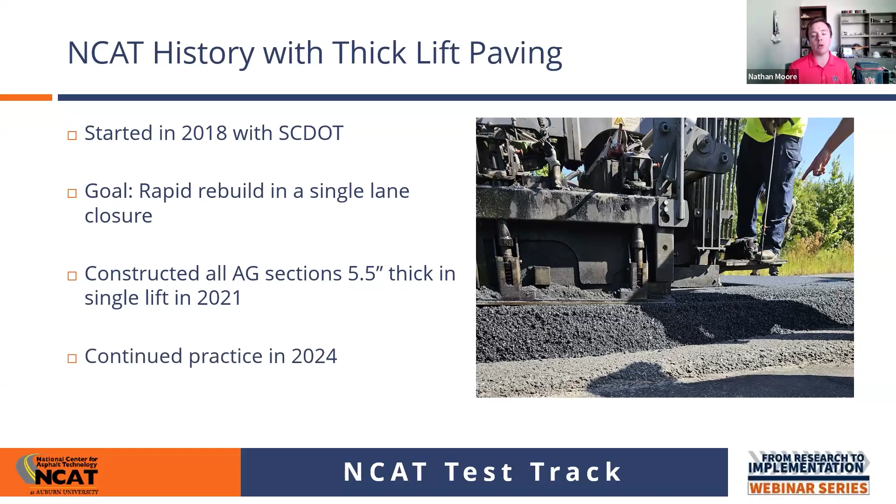I'm going to briefly skip to the end and talk about lessons learned, but then I'll let Travis, Kimmy, and Jay talk more about this. If this picture doesn't make it clear, smoothness can be challenging.

However, on the NCAT test track, we have the added challenge that our test sections are 200 feet. I think the folks over in South Carolina have figured out how to do this really well, but smoothness can be an issue because you really only have one shot at it.

Warm mix asphalt is your friend. It helps with compactability. If you're trying to compact 6, 8, whatever inches of asphalt, that's a lot of material you're trying to move, and any compactive effort aid that you have is helpful.

Joint density is also important. You really only get one shot to seal up that joint. You don't have extra layers to have multiple opportunities to seal it up. So joint density is really important, and I'm pretty sure Travis and our friends from South Carolina are going to talk about that.

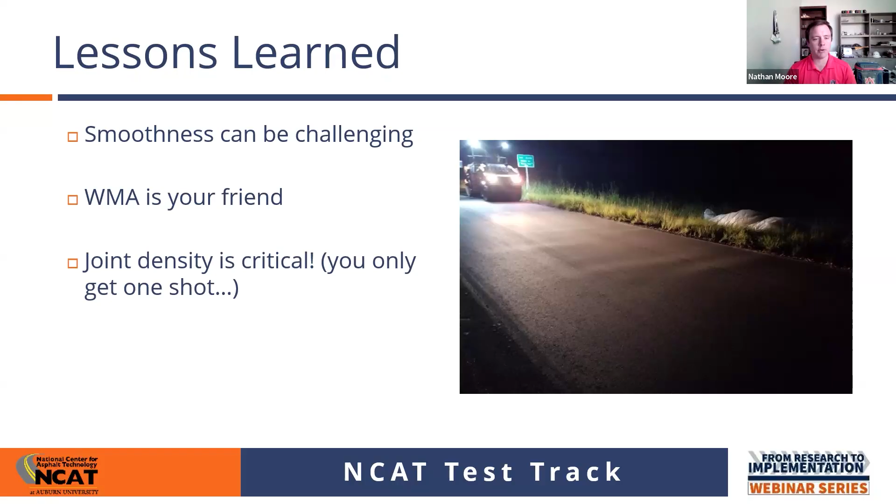With that, I tried to make my point as short as possible because I'd really like to hear what our presenters have to say. So Travis, I'm going to quit sharing and kick it over to you.

So this is something I'm really excited about. It's not the first time we've done thick lift paving on our implementation webinar series. In fact, our very first one about 3.5 years ago was thick lift paving and the work that South Carolina has been doing. So what do we see here?

A road that absolutely needs rebuilt. It's probably failed all the way through. And if we look down that road, we can see that that is a problem.

So I really want to answer this question: how can we reconstruct our full depth asphalt pavements in less time? How can we be less impacting to our traveling public, with less time for our contractors and inspectors out there in the traffic?

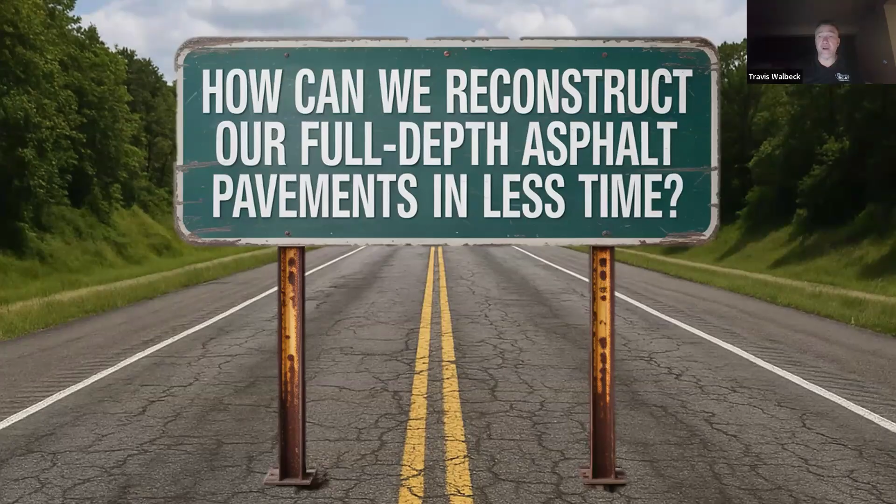And so one of the answers that's out there, one of the things we're doing, is thick paving. Let's pave thick. And when we say thick, how much are we talking, right?

So a lot of specifications out there have a minimum thickness. Some of them also have a maximum thickness. I was just looking at one yesterday morning with a state that had questions about thick lift paving, and their specification has a limit of a 3-inch maximum lift thickness for all of their mixes. So that's kind of a change they would need to make if they wanted to use this kind of technology.

But I like to say that thick lift paving starts around 5 times the nominal maximum aggregate size and goes up from there. NCAT has done work paving as thick as 16 times the nominal maximum aggregate size, and still got density, and still had a good, solid quality pavement.

So what are our concerns, right? What concerns do we have if we're going to do thick lift paving? And that first one is density. That is the concern all the time.

That's, I think, what we all came up in the asphalt industry understanding: that the thicker we go, the more problems we're going to have with density. And through the research that has happened at NCAT, the experience that South Carolina has, and information I'll share from Utah, we have found that density is actually easier to achieve with a thicker lift pavement.

I've also seen research done in Florida and Texas and other states that backs that up, saying that a thicker lift actually gives us a better opportunity for density.

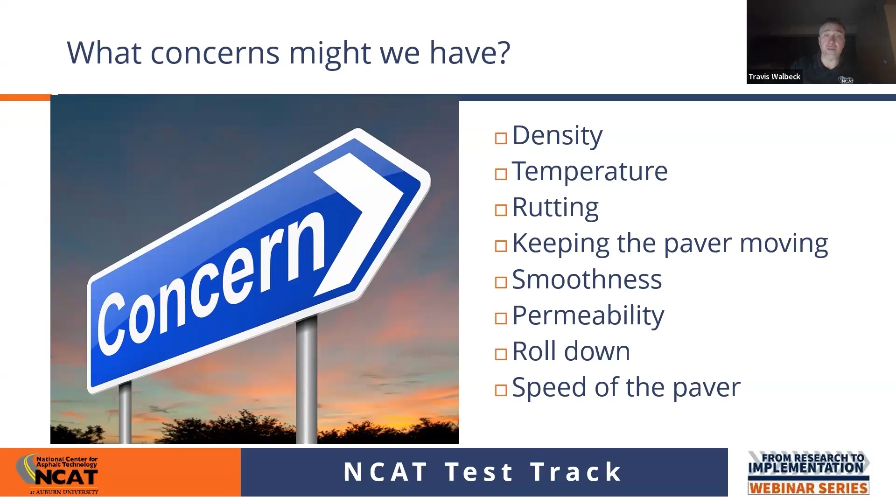And then that paver speed, we're not going to go 35 foot a minute. We're just not. That's kind of something our crews need to work with. They typically want to go a bit quicker, but with that massive amount of material we're putting down in a single pass, the paver's got to move much slower. Plus, our trucking and hauling distances are going to have an effect on how fast we can move that paver.

So I kind of want to cover a few things here. Some of the research that NCAT has done. I also want to talk about a couple states that have really taken this forward. And then I want to talk about some of the specifications and the changes that states have made that have helped them be successful with this thick lift paving, and a few keys to success.

So NCAT's research started, like Nathan mentioned, in 2018 when South Carolina DOT came to NCAT and said, hey, we want to try this. We think it's something that can help us and move this forward. So the first bit of thick lift paving done with the NCAT test track was actually a test section off the track to try to make sure that this could be constructed. So we have this S9 test pass, or test section, that was done off to the side of the track to make sure that was something that could be utilized.

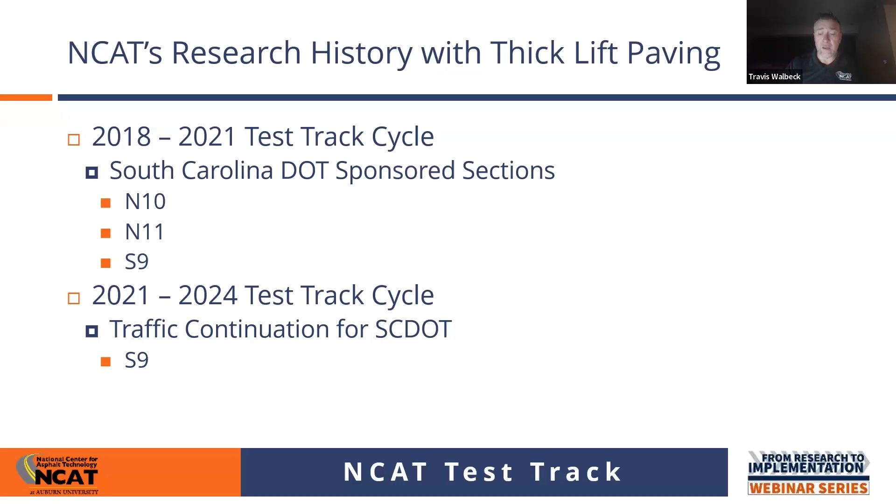During that cycle in 2018, there were actually 3 sections that were built: N10, N11, and S9. All of them performed fantastically. They're really happy with the results we found there. With S9, they decided to continue the traffic into the next cycle, so that ran clear into 2024. And as Nathan has said, they're still doing some deep rebuilds on the test track during construction, and they're utilizing this technology that South Carolina sponsored and helped move forward with the track.

So again, we talked about some of those concerns, right? Density, smoothness, and temperature. Those are the 3 big things that I want to kind of talk about here with the concerns that we may have.

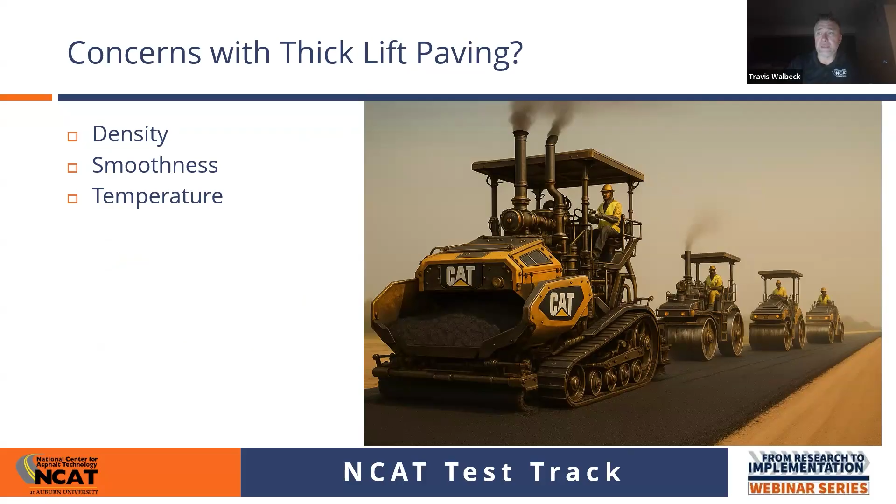With density, the first thing we always hear, and what we were all taught, is you cannot get density when you pave this thick. I really like the videos that Utah DOT puts out. Here's our good friend Howard Anderson, who promotes this technology and the things they're doing in Utah. But he says, yes, you can. We do it all the time. So they are able to achieve that density.

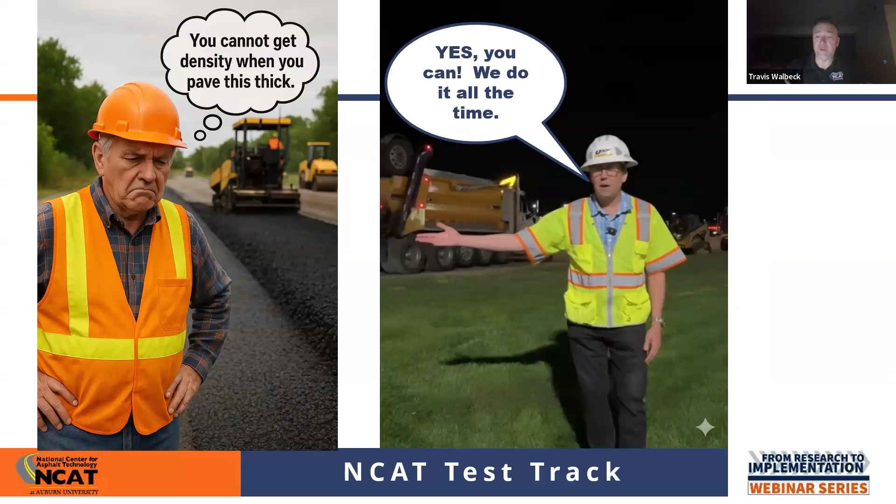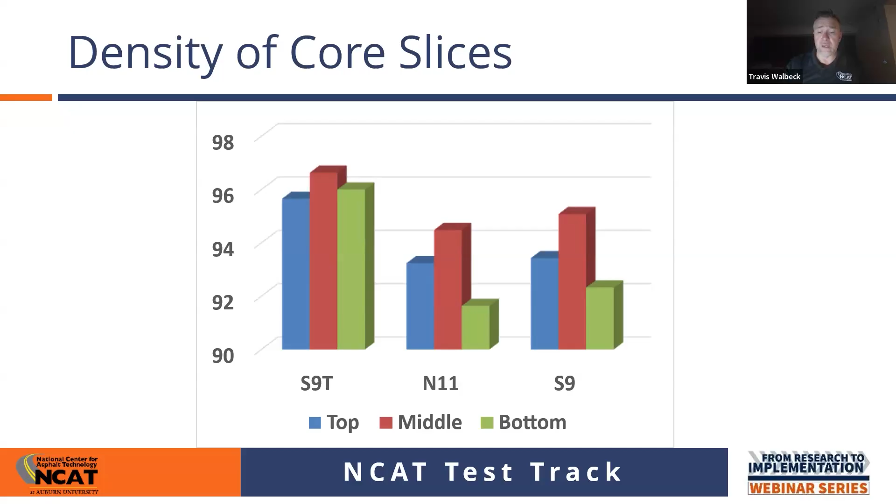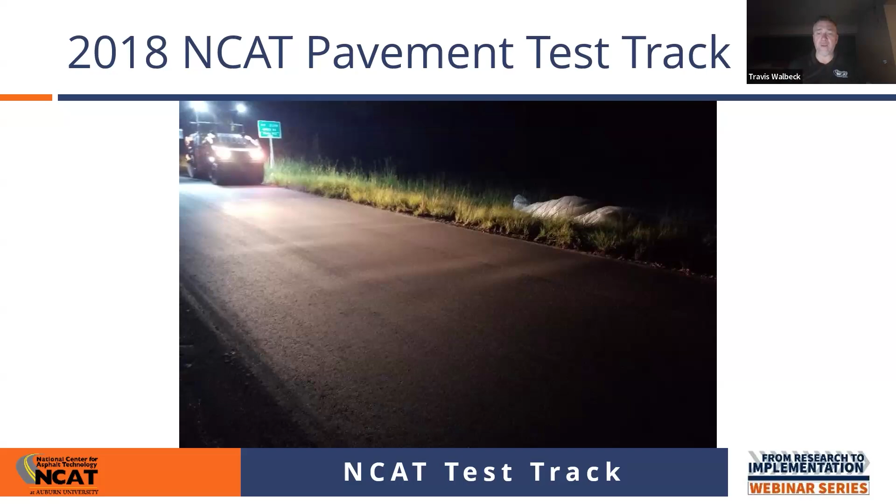Everything we do for best practices is amplified when we do thick lift paving. So stopping the paver, adjusting the angle of attack, moving gates in and out—all of those defects in the mat are amplified when we're putting the material down this thick.

Here's one out on an actual roadway done with thick lift, and you can see it almost looks washboardy, like we were running the vibratory roller too fast, but that's not the case. This is thick lift paving. They were starting and stopping the paver a bit and ended up with what's not going to be an acceptable ride. So we do need to keep that in mind as we implement this thick lift paving.

Can we achieve the normal smoothness that we would with a standard paving project? Probably not. So we need to consider, are we going to allow diamond grinding to bring that back into acceptable smoothness for our users? Or are we going to come back in and do a thin overlay over the top to try to gain that smoothness back? Definitely something we need to think about as we implement thick lift paving.

So for temperature in the mat, with NCAT and the work South Carolina helped us do back in 2018, they came up with a really ingenious way to check what the temperatures were doing through the depth of that mat. They took a wooden dowel and put temperature probes on it, several of them down through the mat, and after the mat was placed, before it was compacted, they inserted this dowel down into the pavement to monitor temperatures as the section cooled and was compacted.

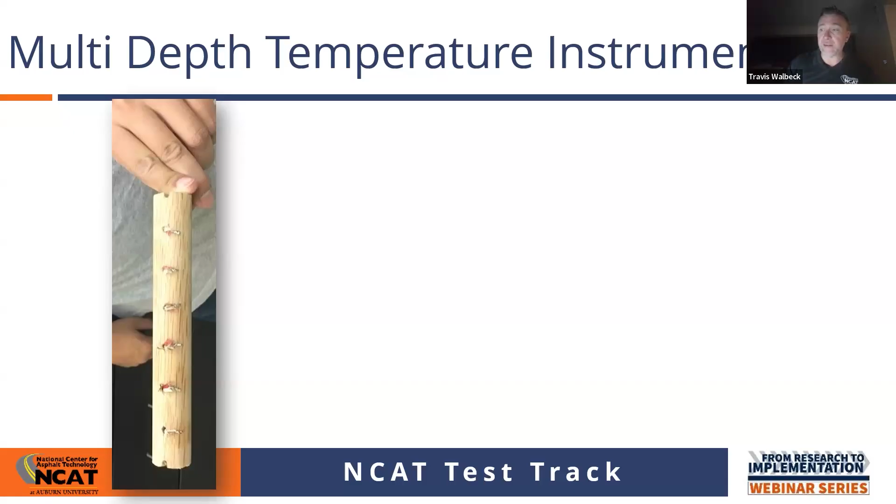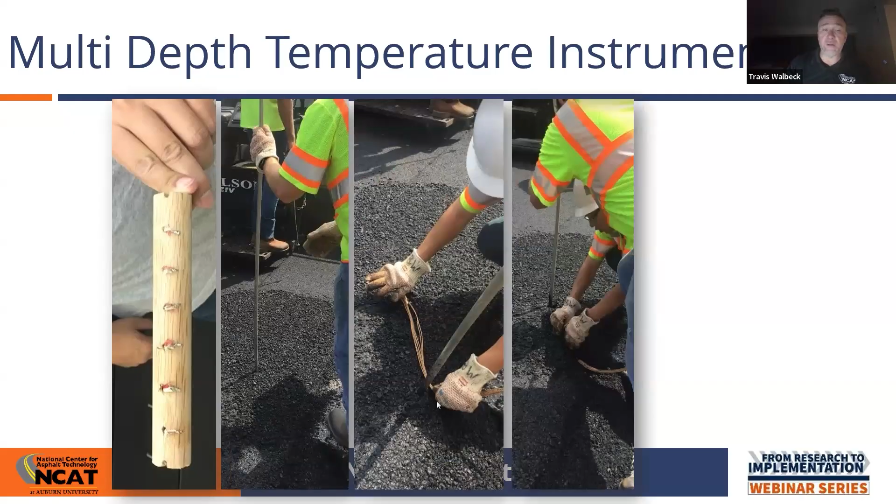So they pushed a metal rod down to create a hole, then pushed the dowel with the temperature probes down in, burying them underneath so the rollers didn't tear them up as we compacted the section. They carried the wires off to the side, and the temperatures could then be monitored.

When the temperatures were monitored, we were really looking at the top third, the middle third, and the bottom third again to find what those temperatures did. In these graphs, the top third is that orange or red line. The middle is the gray, which is always on top, if you'll notice. And the blue is that second one down.

All of this makes a lot of sense to me, that the middle of that section is going to cool slower than the top and the bottom. Think about it—the subgrade material underneath is at ambient temperature, pulling the heat out of that mix. And across the top, we have a bit of a breeze, and the air, whatever temperature it is out there, is far less than the 300 degrees at which we put that asphalt down, so that end starts to cool. It's really that center that controls where we are with the temperatures.

We can see these different test sections, or the different times, on how that cools down. And it takes several hours.

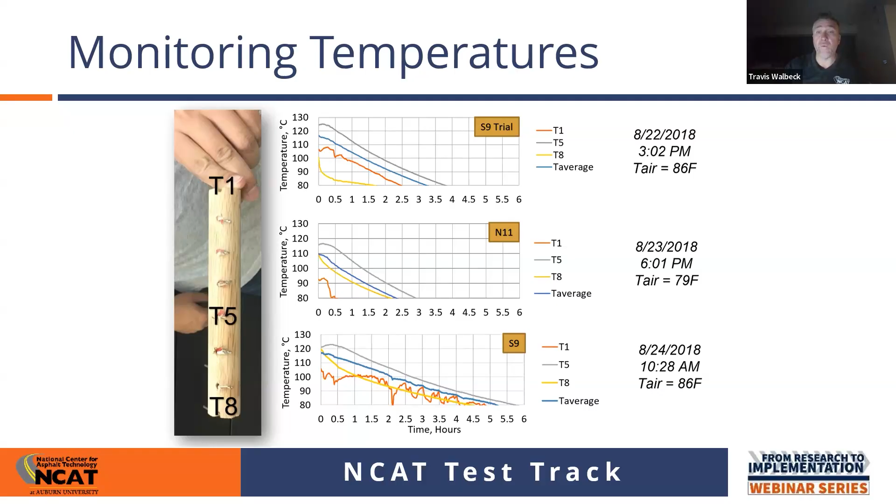That's one of the things we really need to consider. Normally with a 2-inch lift of material, we have 30 to 40, maybe 45 minutes, to get that density, to get from placement temperature down to 170 degrees Fahrenheit. With these projects here, we're seeing that it's taken 3, 4, 5 hours to get that temperature down to ambient. So definitely something to think about when we're putting traffic back on sections done with thick lift paving.

So why look at thick lift paving? Why would this be important? Like Nathan mentioned, quicker construction times are important. So if we have an application where we don't want that roadway or area closed down for a long time, thick lift paving is a way we can do a complete rebuild down to the subgrade in a much shorter duration.

I'm going to show you some photographs here in a moment. Utah DOT, the first one they did, was at a way station at a port of entry at the border, and they didn't want to have that out of service for a long time. We have heavy truck traffic, super slow moving because they're coming across the scales there.

And so this allowed them to rebuild that section much quicker. Another motivation for using thick lift paving is we don't have an interface between multiple lifts. So we don't have concerns about getting bond as we put an intermediate lift and a surface lift back on top of our pavement, because it's all being put down in one single lift. It's definitely a consideration that others are using.

We do have a longer time to achieve that density because these thick mats hold temperature, and we saw that in the graphs on the last slide, how this material holds that a whole lot longer.

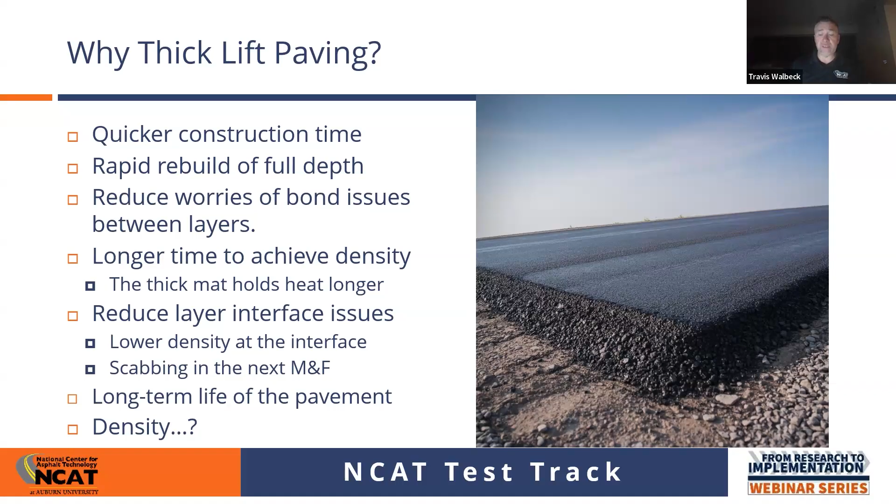And then density. Several agencies have been able to show and prove that it's easier to achieve density when paving thicker. So when it comes to specifications for thick lift paving, some of the states that have done great work here are really modifying their mix designs. They're doing things that kind of break the rules we all live by with Superpave or Marshall mix design, and these things actually help their mixes become more compactable and work better with thick lift paving. So I'm going to show you what South Carolina's mix design looks like, and a little bit of what Utah's mix design method looks like.

But air voids, we typically design to 4%. That's what Marshall did, and that's what we typically do with Superpave. There are some states that will drop that down, maybe 3.5 or so. But South Carolina is going to 2.5% air voids on their mix, and Utah started out around 1%, but right now their specification is 0.75% to 1.25% air voids, which for those of you who have been around mix designs and done this for a long time, that's a scary place, right?

We are always shooting for this 4%, so it's a scary thought to say we're going to have really low voids even in our design. Also some binder changes—some states are putting a minimum binder content in here to make sure we don't get a dry mix, to make sure we have that asphalt binder when it's hot, acting as a lubricant, letting particles slip past each other so we achieve the density we want. We need to make sure we have enough of that binder in the mix.

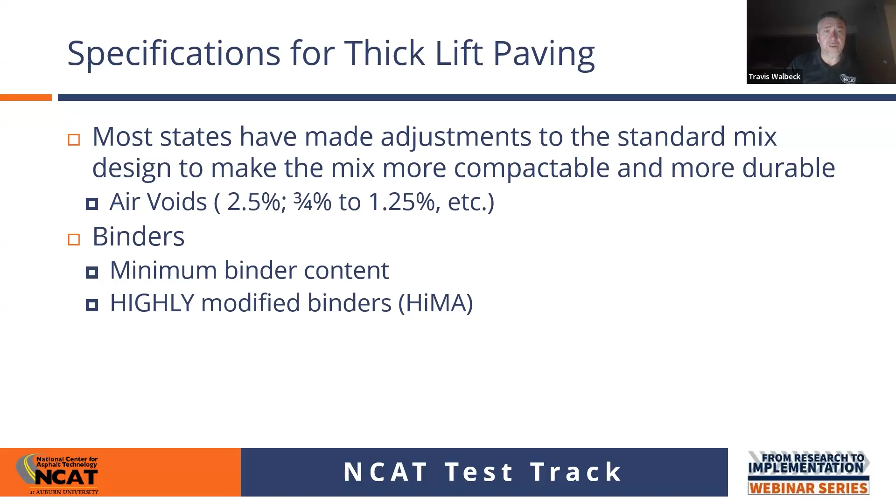And then highly modified binders are another thing we're finding states using to find success with these thick lift paving jobs. To highlight what Utah and Howard Anderson are doing right now, they're calling their mix design that they use for thick lift paving high mod. They use it for other things as well, but this is the mix for their thick lift paving. They call it their high performance mixture.

It's used on interstates, high volume routes, overlays, rehabilitation. I grew up in Utah, so there's some routes I drove a lot as a teenager that UDOT has been using this high mod thick lift on, and I'm really excited to go check those out when I visit back during the holidays. They're using both a 1/2 inch and a 3/8 inch nominal maximum aggregate size for their thick lift paving, going as thick as 8 inches.

They are using a highly modified binder—this is a PG 76 minus 34, so we'd typically call this a HiMA binder in other contexts. But it's something they require. They have a percentage range for their AC content with these mixes—they want to see somewhere between 6 and 6.8, written into their specification. As I mentioned, their design air voids are 3/4 to 1 1/4, at 50 gyrations, so they're really working that mix design side to make sure this mix is compactable.

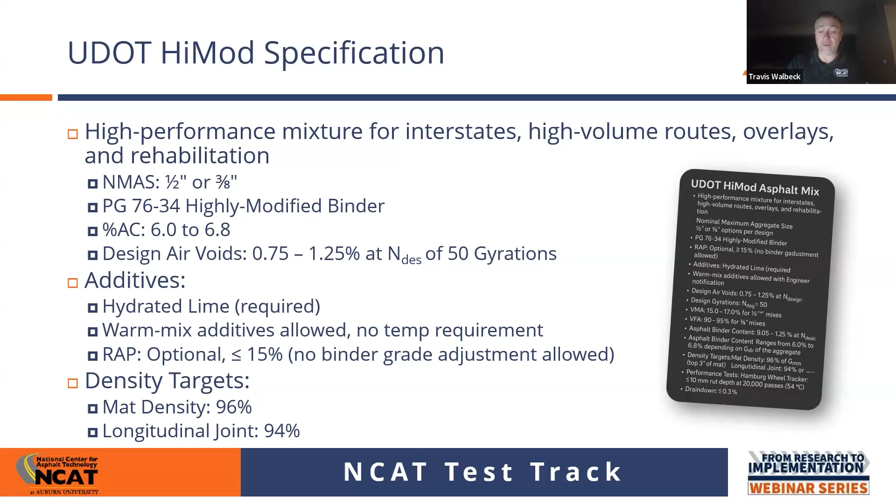So Utah has really paid attention and said, we only have the one chance, so we're going to make sure we get a really good density on that joint. Most joint densities we see in specifications are around 90%. Utah's using 94 at this point.

Here's the port of entry over in Wendover—they did that thick lift paving for their first project. One fun fact is that the contractor, the day before the project, had done a test section in their yard at the plant, done in the midday or so. At 3 o'clock in the morning, they were very concerned because it was time to start production for the actual project, and it still hadn't cooled down to ambient temperature. But the project turned out really, really well.

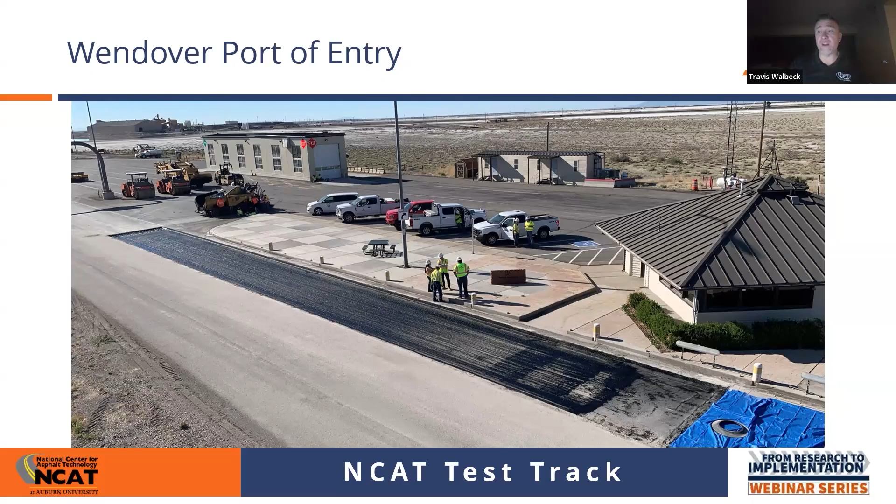They've gone back and looked several years later and seen pretty much no rutting—it's really performing well. If you get a chance to see Howard's presentations on what they've done there, it's definitely worth your time to see what he's done.

So temperature is a big deal here, right? We have that temperature that takes a while. This graph is from some of the stuff that Utah has done, and we can see on the x-axis there is time in minutes, and on the y-axis is the temperature.

So we're starting out at about, what's that, about 280 degrees or so. We see that quick drop off the bat, but because this thick mat holds so much temperature, we get out here to 3 hours and we're just now getting down to that temperature range of about 175 degrees, where we would consider that we're not going to get any more densification of the mat even if we roll it again.

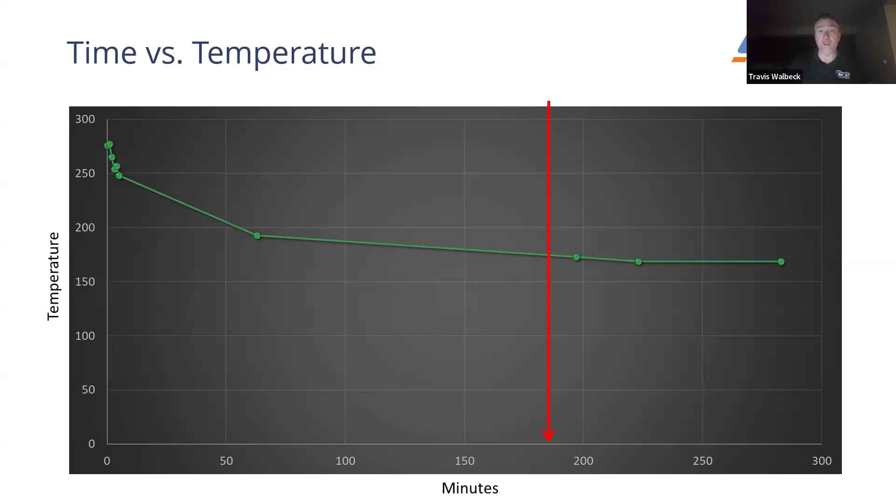So definitely something to consider when we're doing these projects. We can get the process done quicker because we put it all down at once, but we need to watch that temperature before we release traffic.

So here's some core results from the work that UDOT has done. As you can see, most all of those are well into that range of that 96 that they're looking for, or above it. A couple of those are a little bit less. Their specification currently says that when we do a thick lift paving project, we're going to pull a core for density. We're going to cut the top 3 inches off, and we're going to check the density on the top 3 inches, and we're going to check the density on whatever that remainder is.

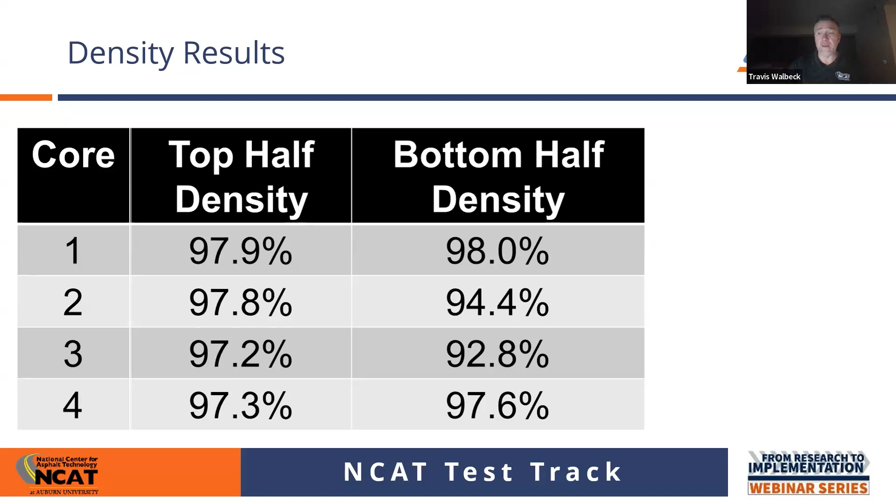So here they have their top half. You can see that all of those are above 97%. So I have a lot of confidence that they've closed that off. They're going to make sure that they don't have any permeability problems here with having those voids interconnected.

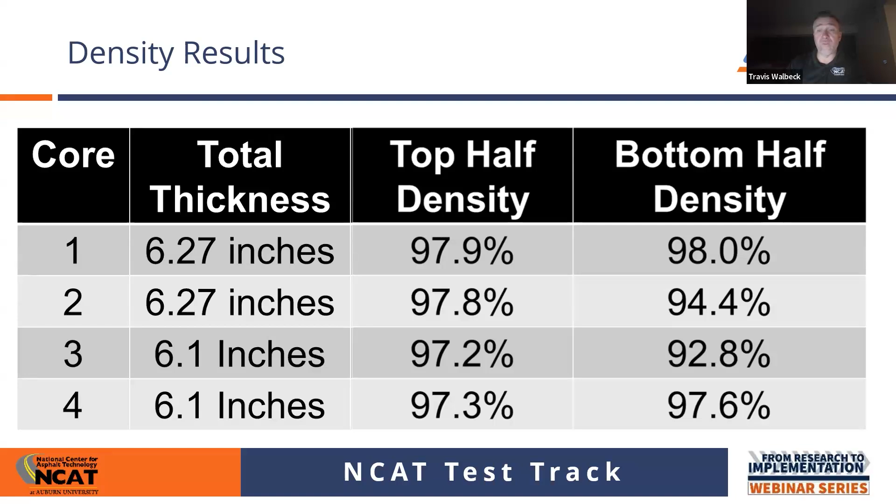The bottom half, most of those look really good. A couple of those are a little bit different. But when we go back and look at this, this is 6 inches plus on this set of data that they have shared with us here on the amount of material that they're putting down, and still achieving those densities. And I know for so many of us in the asphalt industry that have found issues or concerns with that, been taught that when we go thick, we can't get density, here's just another data point that shows us we absolutely can do that.

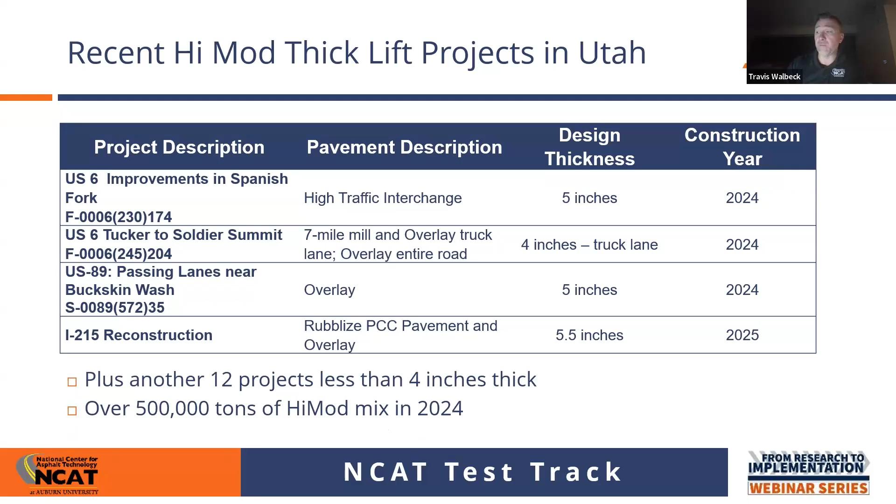They've really embraced this in Utah. They've put a whole bunch more projects out there. Here's a list that they shared with me of the projects that they were doing. In 2024, they put 500,000 tons of their HiMod mix down. So they've really embraced this and moved forward with it in Utah.

South Carolina, I don't want to take too much of what Jay and Kimmy are going to talk about. Their mix that they're using there is called their Type B intermediate mix, and it's used for rehabilitation repairs, interstates, high volume roadways, primary routes. I know they use it on some of their beach areas where they have tourism there. That's a big driver for the economy in that part of the state. And so if we can get in and fix that road and get back out of there, then we're not disrupting the tourism traffic. They're using a 1/2 inch nominal maximum aggregate size mix here.

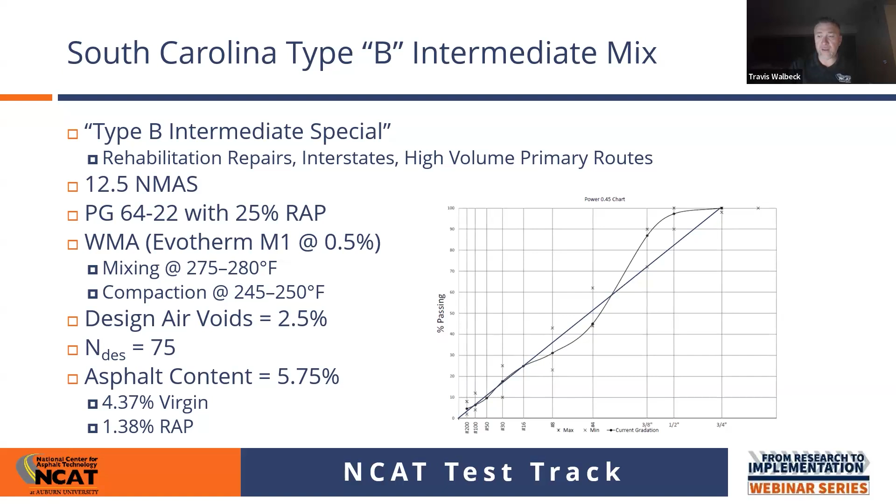They're using a pretty standard PG64-22 binder, but they do allow a fairly significant RAP content there. They are using warm mix as well to extend that time available to get the compaction in. They're running at cooler temperatures, so they're keeping their mixes down under 300 degrees Fahrenheit here. And like I mentioned, they run 2.5% air voids here. They're running 75 gyrations on this, and then on this example here, they have an asphalt binder content of 5.75%, and that's the breakdown of what the virgin and the RAP contribution to that binder content are.

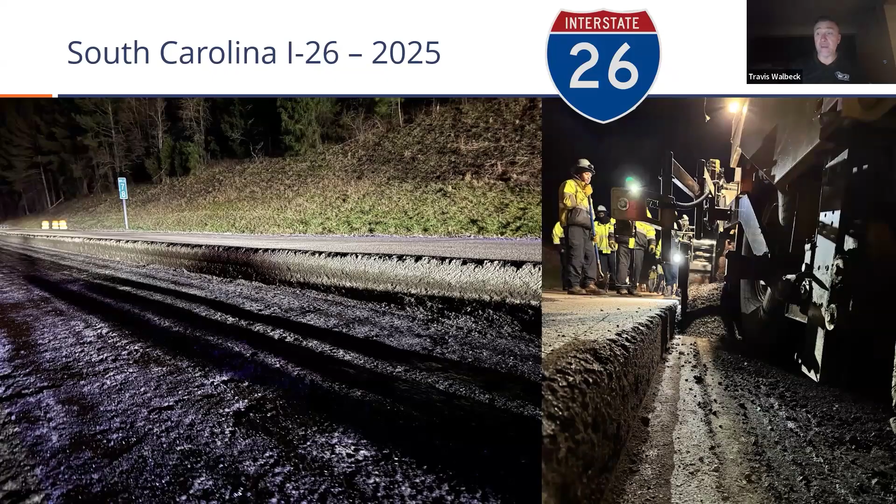I got the chance to go visit one of their projects a while back. This is on an interstate, on Interstate 26, and you can see they have gone deep. This was 8 inches they milled out that night, and then they came back in and put 8 inches back in, got it compacted, and off they go. So really neat to see them embrace this technology and move forward with something that they researched with us at the NCAT test track and move forward into production.

Some of the keys to success that we've learned from these agencies that are using this a whole bunch is that we need to adjust our mix design.

We can't take that off-the-shelf mix design to make it work. We need to do something. Air voids is probably the thing that stands out the most. I do like also that they're using the warm mix in these.

Balancing the operation is key here. Make sure that we have enough trucks to keep that paver moving, because every mistake we make is amplified with our thick lift paving. Understand that every best practice is amplified when we do this. Smoothness is key. We need to use all those best practices, keep the paver moving. Don't be chasing the angle of attack out there.

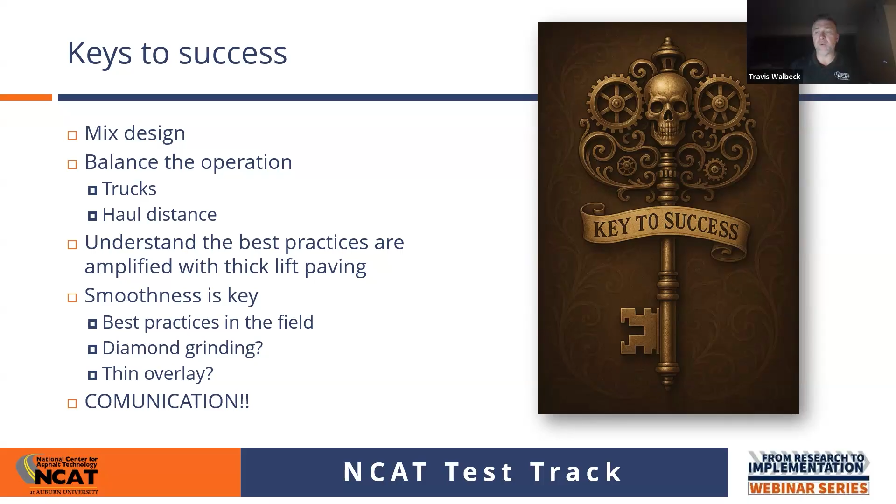We may need to have in our contract the ability to come back in and diamond grind to get the smoothest we want, or put a thin overlay on to get the smoothness that we want. And communication is so important here, not just between the agency and the contractor, but the contractor's internal communication on trucks coming back and forth, keeping the trucks spaced out. All of those things become really, really important to be successful with these thick lift paving projects.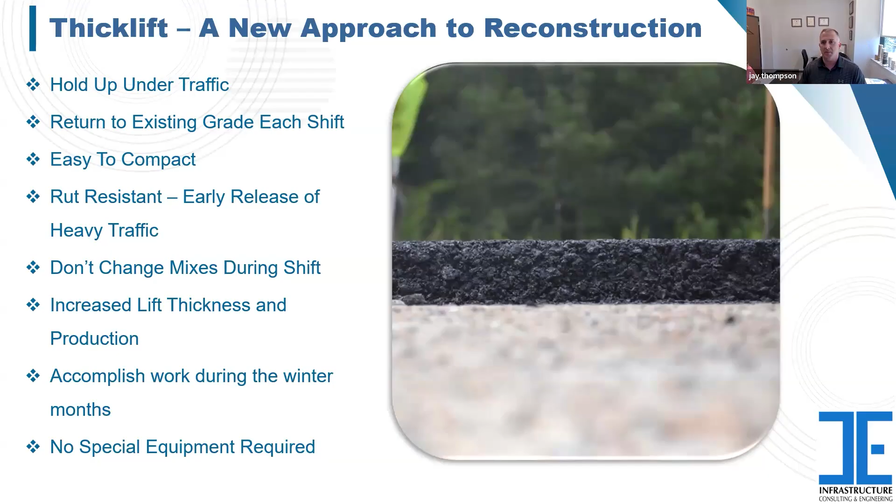That first project, again in 2015, began right at the end of January, beginning of February. And the first night we did the test strip, it was about 31 degrees. And it worked out pretty good. We didn't have any issues with those colder temperatures. Ultimately, that project was a 10-inch replacement on the outside lanes and 5-inch on the insides. That 5 was done in one lift. The 10 was done in two. It did have a surface and an OGFC on the top for final.

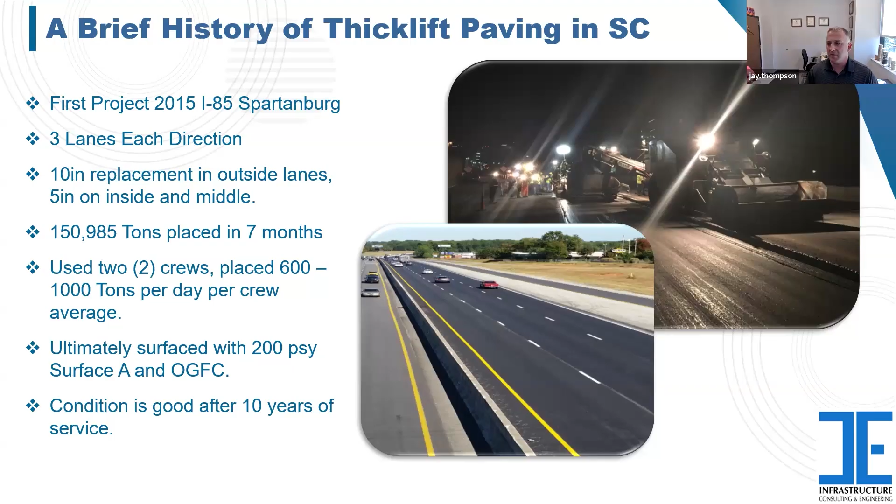150,000 tons replaced in 7 months. They used 2 different crews to do that. And there was a time incentive. It was an A+B contract, so it moved very quickly. 10 years it's been in service. I rode through it last week and it's still looking pretty good. After that project, I-385 in Greenville was the next interstate project.

It was just a year after. We did 14.5 inches removal and replacement in one night on the outside lane for about 4 miles, done in 3 lifts. That project turned out pretty well. They made those lifts incrementally shallower as they got to the top to help with the ride. There was traffic on that for about 18 months before the final surface got put on it.

Next project that came along was a primary route, SC 544. We replaced 5 inches in one go on that project, done during the winter time. So we decided to diamond grind the surface to get a ride. I'll tell you a little more about that project later.

After that, the department started getting pretty comfortable with using it, and we started allowing it for full depth patching all around the state. Then we started using it for shoulder widening, particularly where the travel lane is being widened—going from a 10-foot lane to a 12-foot lane plus a paved shoulder. In that case, it's going down usually in either 400 or 600 pound per square yard lifts.

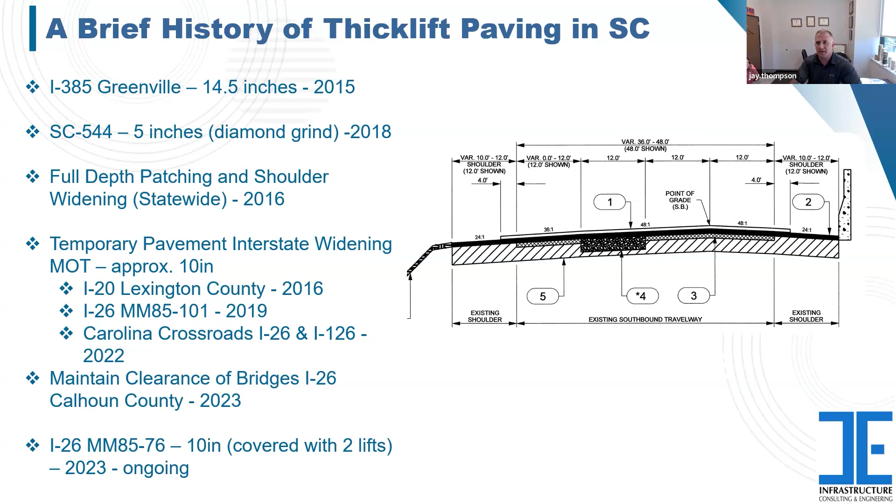That worked out nicely for the department. Right now, one of the projects Travis mentioned is a 10-inch replacement on I-26 that has been going on for a couple of years. There have been a number of smaller projects. I wanted to feature districts 5 and 6, coastal areas near Myrtle Beach and Charleston, which have been using it a good bit in high traffic areas where we want to avoid drop-offs. A lot of those have been in the 5 to 6 inch range.

And we've used diamond grinding on a couple of different roads now, but most of them have been covered with a lift of surface.

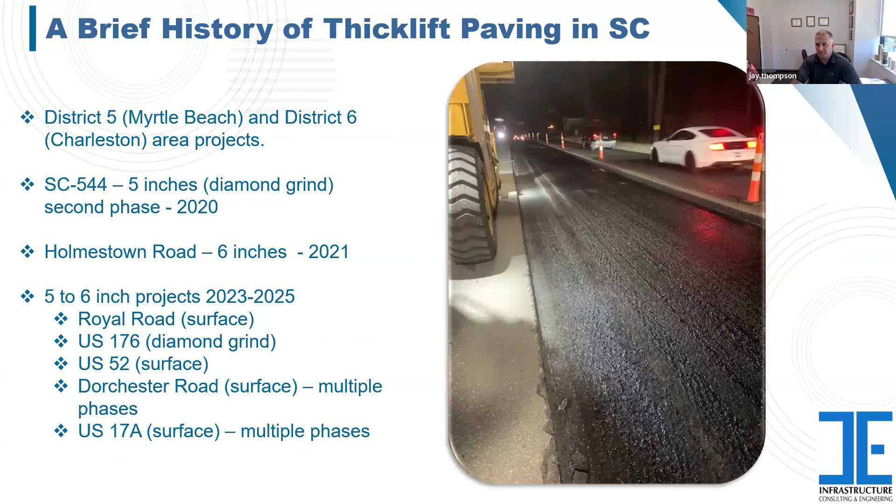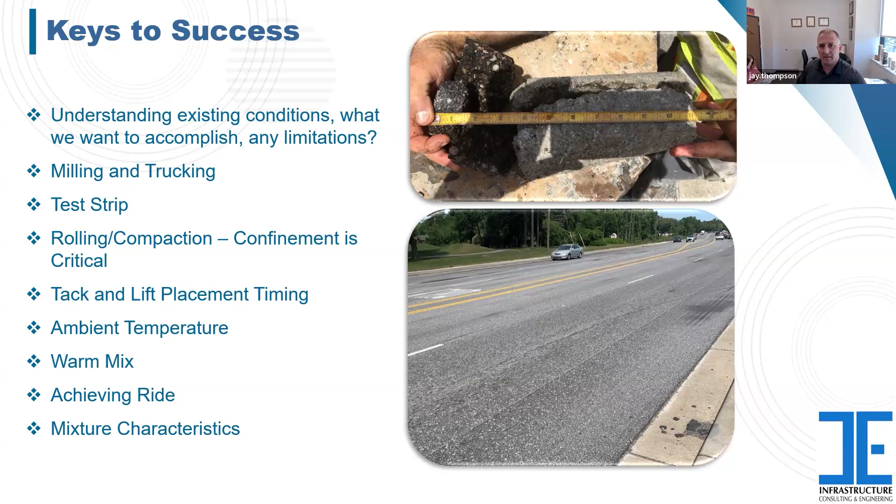So some of the keys to success we've seen are: first, understanding what's there, milling and trucking, and how that controls the time of the operation at night. Test strip is very critical. Rolling and compacting is a different kind of material—it's very tender, and we've found that confinement is very critical. The type of tack and how we place our lifts and timing impacts how much production we can get in a night. Ambient temperatures, using warm mix has been very helpful. Achieving ride is critical, and then just the mixture characteristics itself.

So going into each one of those a little bit: understanding what's there. Obviously, we're trying to rebuild a road that is full depth damaged. But we have some roads here in South Carolina that are full depth asphalt, and some on base or cement treated bases in some cases. We just need to understand how much asphalt we have, what's there, and what we're going to be placing this thick lift on top of.

There are cases where the asphalt itself just needs to be replaced and we can still keep the base. Or in some cases, we're going to be placing it on subgrade. It's just very important to know what you're going to be dealing with.

Secondly, what are the limitations of how we're going to run the equipment? Do we have curb and gutter that we need to tie to grade on? Do we have a barrier wall that we need to tie to grade on? Do we have room for dual lane closures? That's a big part I'll talk about a little more here in a minute. Just understanding the features of the road that may restrict the way this operation is run.

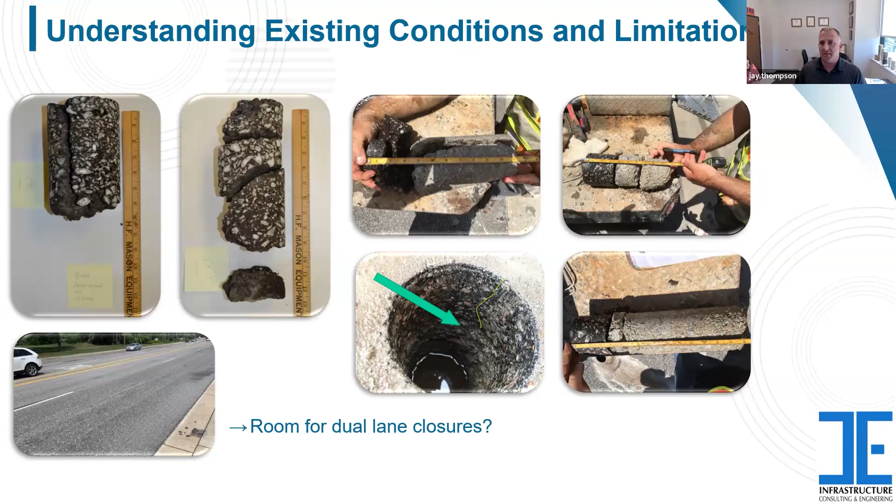So milling and trucking are very critical, often dictating the amount of production you get in a night. The first step is removing it, and if that goes really slow, you have less time to put it back. So a lot of times our contractors are using multiple milling machines—2 is very common, I've even seen 4 on one job.

Usually they're having to make more than one pass in order to get depth, more than one pass in order to get width. So having enough milling machines to get it out quickly makes a big difference in how much you can put back and how far down the road you can go in a given night.

One thing that occurred on our second job here that I want to point out is the belt housing cover on this milling machine actually restricted how far we could mill down, and we had to step that milling operation over in order to facilitate just the way the machinery was built.

In this case, we actually ended up liking it because it staggered that joint for us. Whenever we can stagger that vertical joint, we prefer to do that. Sometimes we don't have enough room—it's not done every time—but the main point is making sure you understand how the milling operation is going to work and have enough trucks to get that material off and bring material back.

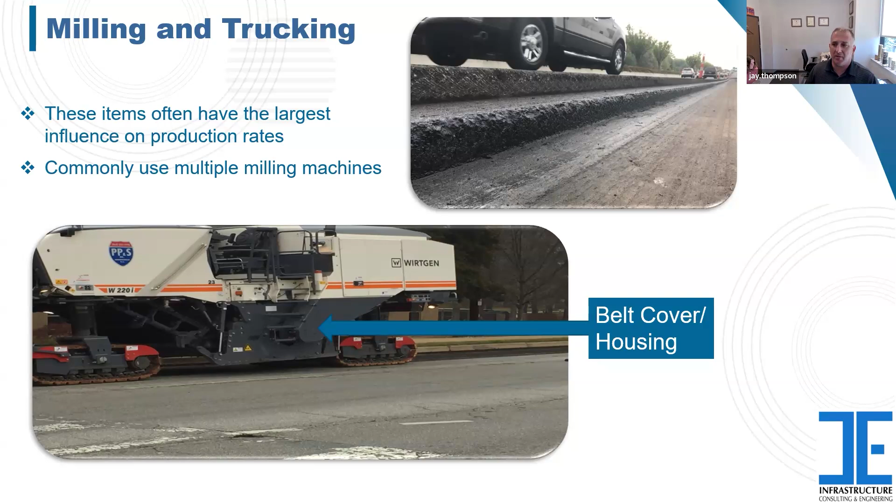This project was actually designed to be done under dual lane closures, but one portion of the job, they elected to try to do some work during the day with a single lane closure, which forced them to have to back the trucks up down the cut in order to access the paver.

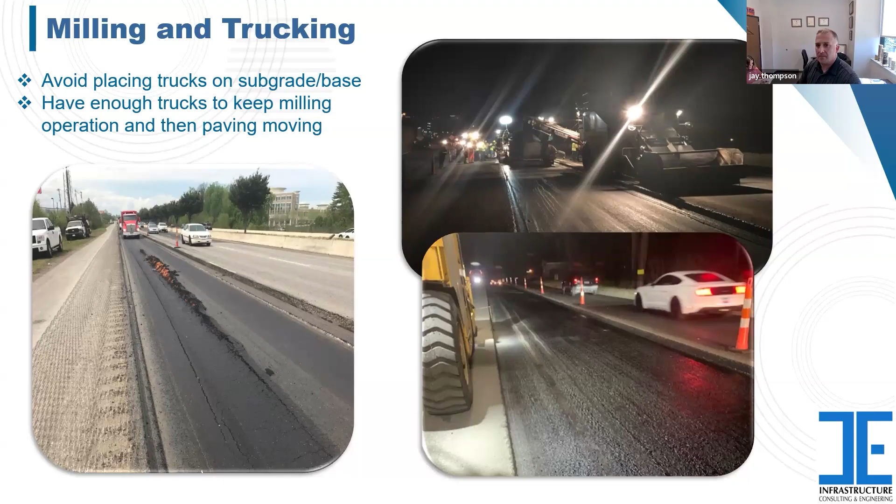Test strips, very important, just to make sure that we understand how everything works. Our specification requires a 500-foot test strip for any lift thickness greater than 300 PSY. We try to do that on the shoulder where possible, and in most cases, our dual lane pavements on the interstate shoulders match the main line, so we're still dealing with the same kind of conditions we would on the main line. It's a good way to get a feeling for the operations.

These temperatures vary throughout the project, and sometimes the way that mix reacts varies. The first project we did started at 31 degrees in the end of January, February, and it ended in 100-degree temperature in July, and they did have to handle it a little bit differently. At one time during that first project, we thought we may need to do two different test strips, but the compaction and everything still ended up looking good. We didn't have to dig into the details quite so much.

But what we do is similar to what Travis mentioned: cut cores on this test strip and then bisect those cores. Over here on the far right-hand side of the screen, you can see that was the very first test strip that we did. That was two 5-inch lifts, and we bisected the top and bottom of each lift and ended up getting pretty consistent compaction throughout that. We also checked over on the joint within 2 foot of the edge to make sure we were getting acceptable compaction there.

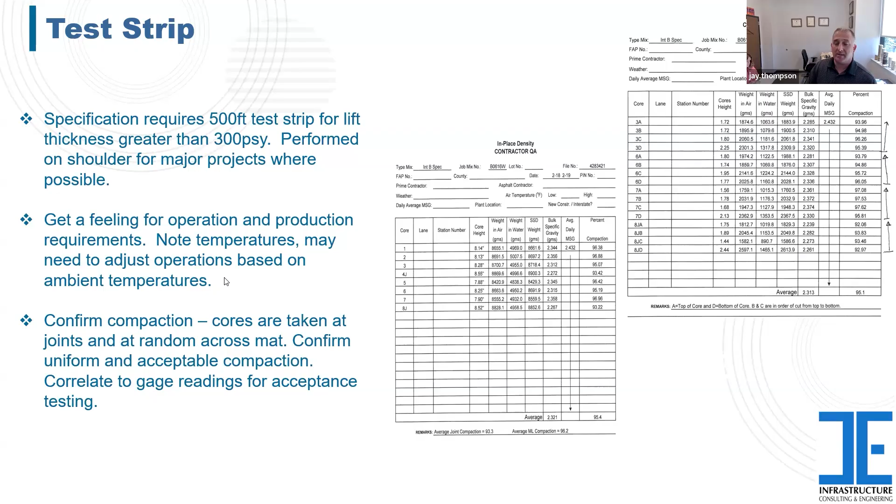And then we run nuclear gauge shots to correlate to this, and ultimately, in the end, we use nuclear gauge shots for the whole process for acceptance so that we don't have to wait on coring at the end of the night, and we have a little more time. A lot of times we're pressed to release to traffic at the end of a night's production.

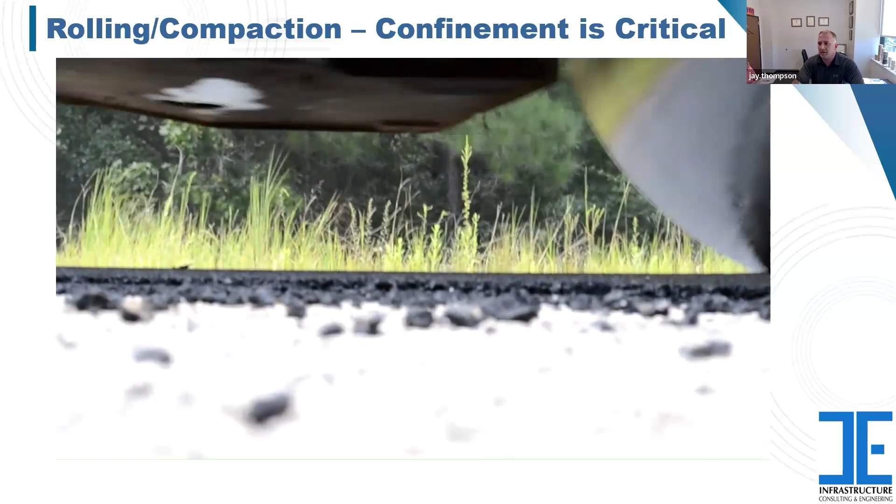I want to show you a quick little video here, rolling and compaction. This material is definitely tender. This video was the test strip at NCAT. I took this video when that S9 section was constructed. This is an 8-inch lift. I want you to pay attention to how this material moves in front of the roller, both ends of it. We did see a similar amount of roll down, a quarter inch per inch, on this particular and most of what we've done, but this material is very tender.

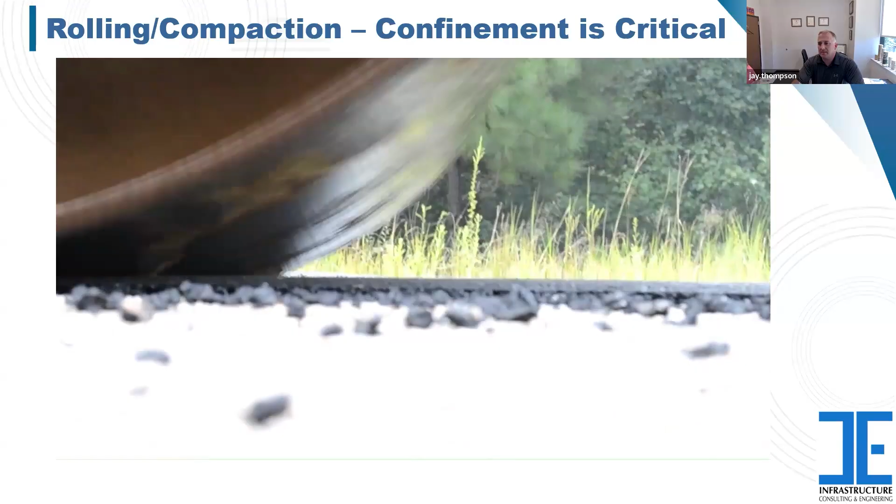Having it confined is very critical, both to get the compaction, but also to make sure that we end up having the cross slope that we want. I'm going to show you that in a minute.

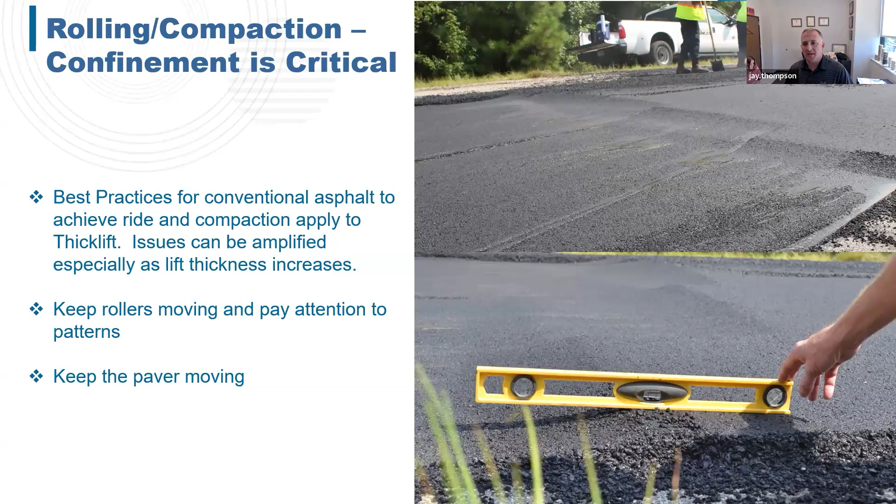This is another view of the same test section. You can see how rollers stop. You got a large displacement there, a lot of roll down. If we miss anything on our roller pattern, or if we have rollers stopping and sitting, or if we stop the paver, you're going to know it.

That outside edge walked more than a foot to the outside than what we had anticipated, and we ended up being quite steep on the cross slope. This needed 2 to 3 inches in some places of correction on the outside in order to get back to a 2% cross slope. So this performed fine under traffic for about 18 months, more than 50 to 60,000 ADT, with probably in the range of 15% trucks. It worked fine, but it did require a little extra asphalt to correct that because of the material walking away from the roller. So just be aware.

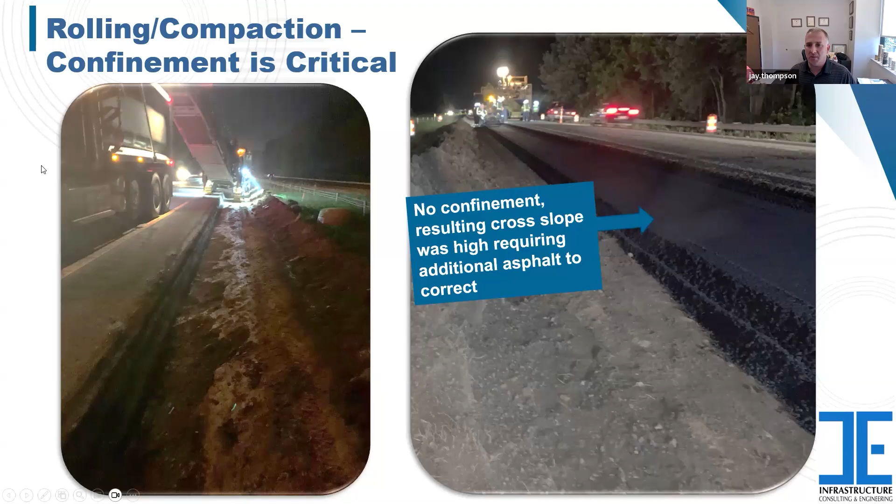Tack and lift placement: we utilized the PG64-22 tack between lifts so they didn't have to wait for it to break. But the problem was, in any case where we needed to put a truck in there for whatever reason, we couldn't have a dual lane closure. We had tracking issues with that. So PG64-22 is no longer required, but it's allowed by South Carolina specification. It also allows normal hot applied tack.

We do definitely encourage using hot applied material on the vertical faces to ensure a good joint is being produced there so that we don't have any water infiltration. Our first projects did not wait for lifts to cool in between, and we didn't see any big issues there. Again, the first two projects we did, everything was about speed and time, and we did not see any issues with it. But now our more recent projects are waiting between those lifts, and it doesn't seem to be a tremendous time factor for us.

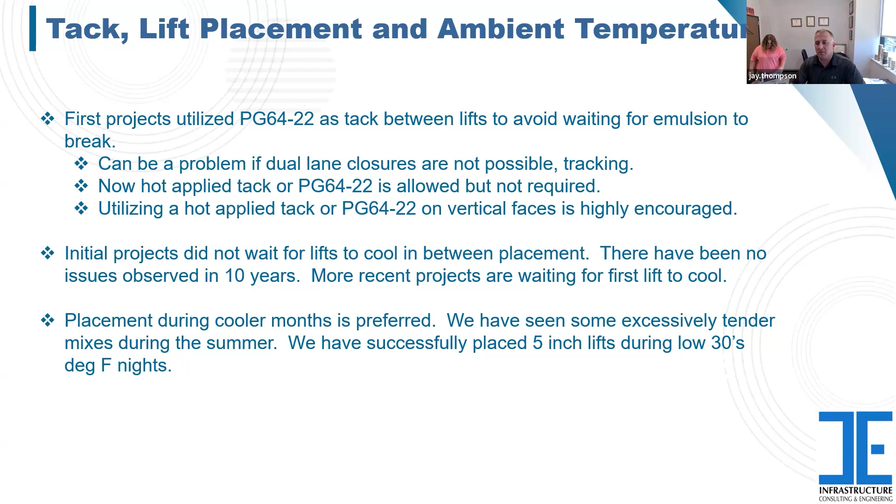We do prefer that it's placed during the cooler months. We have seen some excessively tender mixes during the summer, so just be aware of that. We certainly prefer to place it during the winter if possible. We incorporate warm mix to get a better time for compaction window and temperature uniformity.

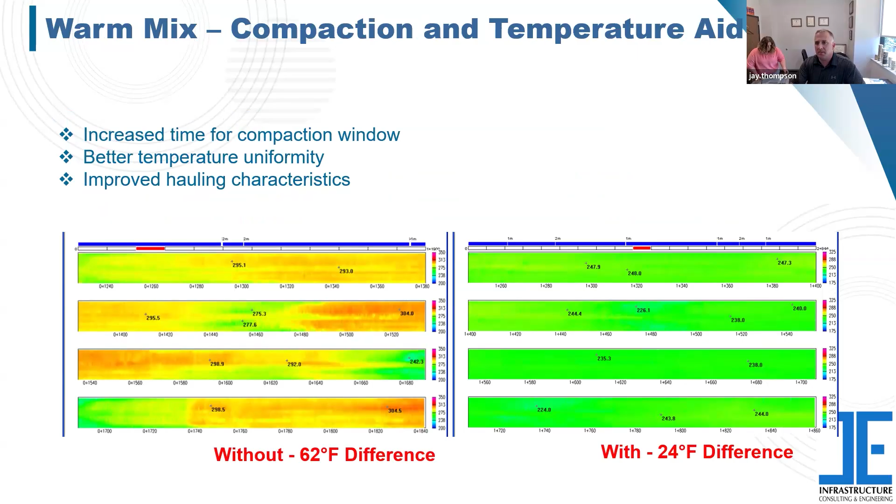Ride is worth mentioning twice here. Best practices apply and they are amplified. I think you've heard it four times in this presentation today, and it's four times important. One of the biggest issues we've seen on a recent job was at the beginning of a day's production, when they first start pulling off. Sometimes that can be a problem spot.

This I-26 project that is ongoing now, they have started milling 3 or 4 inches down into the previous day's lift to start their pull and then coming off of it, and that improved things greatly for them. That has not been done on every project, but that particular contractor is using it to improve their start and stop ride bumps that they were getting.

You can get a ride on one lift, but it's pretty difficult. We pretty much count on covering it with either a lift to surface or diamond grinding. And why the diamond grinding? We've seen some improvement in noise. The pre-grind ride on 544 was about 132 inches in the worst spots and as low as 21 in the best spots after grinding. That's roughly a little more than 50% reduction in IRI.

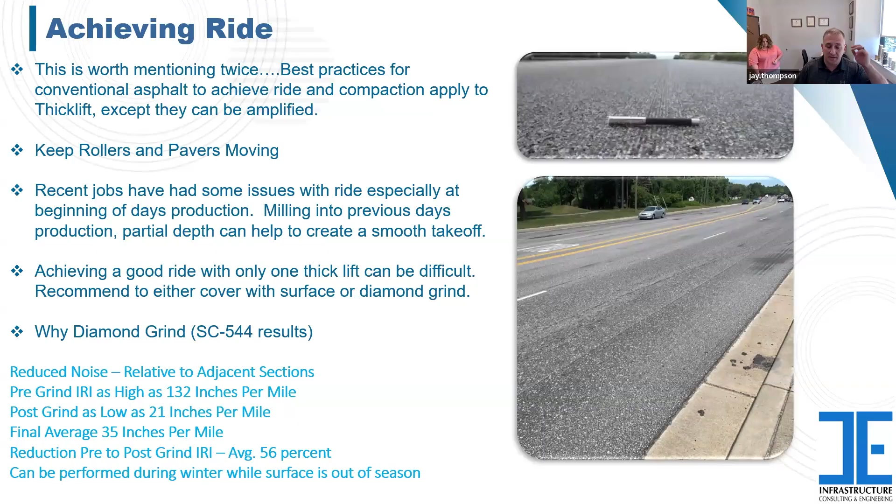One of the big things for us is that it can be done when it's cold. We don't want to put our surface down when it's really cold, but you can diamond grind, and we can do thick lift during the winter months. So the main reason we used it on the first project was it had to be done during this particular time, and we wanted to get the project completed. So we said, well, let's go with diamond grinding — we don't necessarily have an impact with temperature there.

And ultimately, it turned out pretty good for us. Quick look at some of the pre and post ride IRI on the 544 project. The pre-ride was up here around the 60s to 80s for most of it - this is just one portion of the job. The post ride was 20s and 30s, mostly with a couple in the 40s. Very smooth pavement. It's turned out really good for us, still in service.

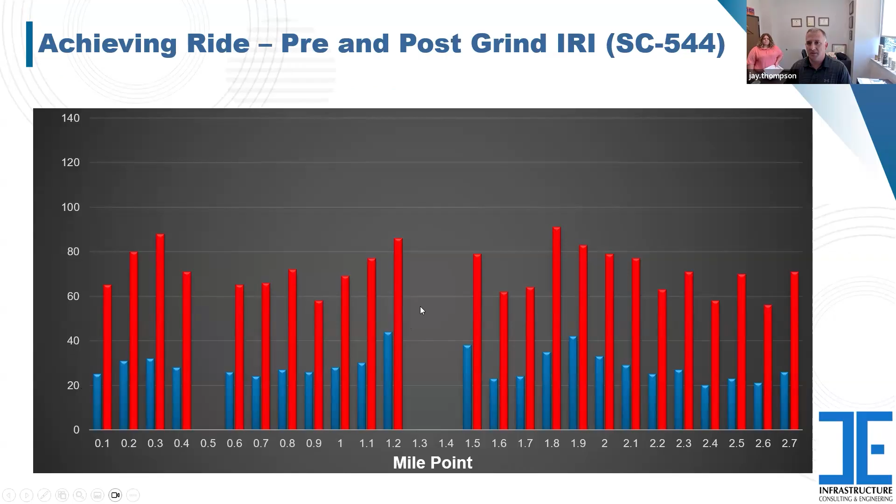I'm going to go really quickly through the mix design objectives. Travis, Nathan, and Jay at some point has hit on these. But when you're looking at what were the objectives for the mix design, we wanted to place a mix that would hold up under traffic. It needed to be stiff enough so that it could serve as a riding course as well. But we also needed the mix design to be fine enough in gradation that it would seal out water if it was exposed for several months or even until the next construction period. We also wanted to make a mix design that's easier to compact, but it still needed to obtain as much maximum density as possible. In order to do that, we're also going to return it back to heavy traffic the next morning prior to rush hour. So we needed to make sure we're getting that density. We need to make sure we're doing the things that we need to because we are going to expose it to traffic within hours.

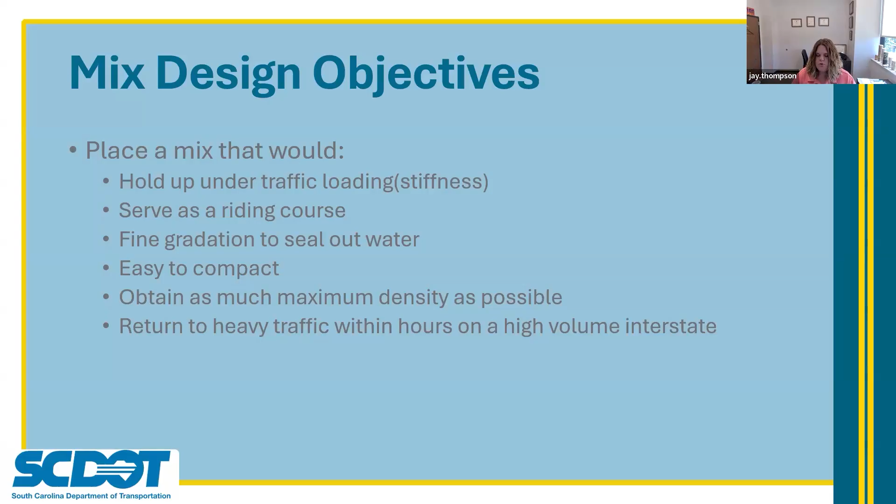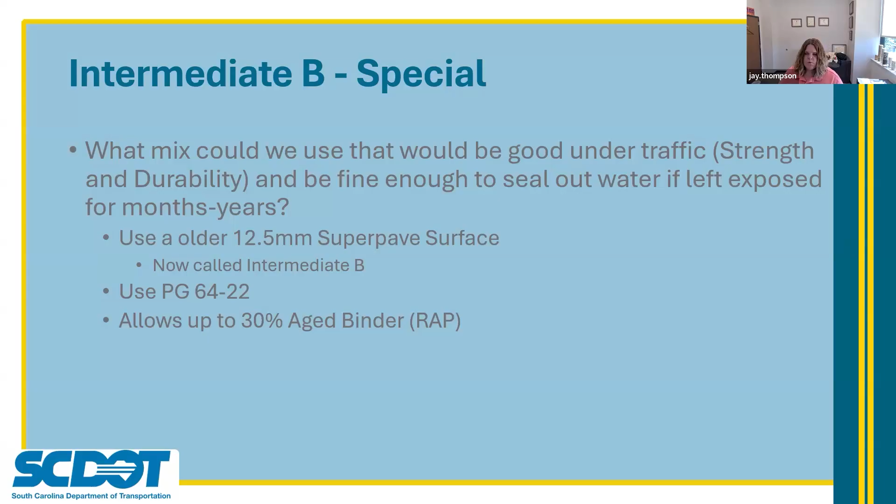So what mix could we use that would be good under traffic, both in strength and durability, but fine enough that it would seal the water out if it's going to be exposed for several months to years? We chose to use an older 12.5 millimeter superpave surface. We now call it our Intermediate B. We chose to go with a PG 64-22 versus a modified binder, and we also allow for up to 30% aged binder or RAP because we wanted that stiffness in there. So how do we make the current Intermediate B mix more durable and easier to compact?

We need to lower our design and field air void targets. We reduced them from 4 to 2.75%. We're going to increase our binder content. We also lowered our gyrations from 100 to 75 gyrations. We still allow RAP because we want to increase that stiffness, right? We want that rutting resistance. And we chose to go with a warm mix aid so that we could have that aid in compaction.

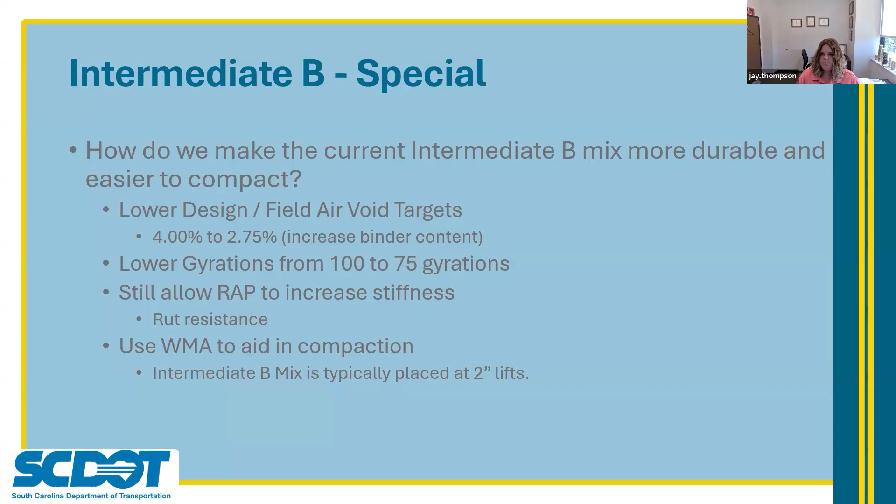Intermediate B mix is typically only placed at 2-inch lifts, so our Intermediate B special is going to be placed in a thicker lift. So again, how do we obtain the lowest return to traffic temperature, and reduce the chance of premature rutting and pavement damage? We're going to use warm mix technology, or a warm mix chemical process, to do that. Here in South Carolina, we cap our Intermediate B special at 285 and lower.

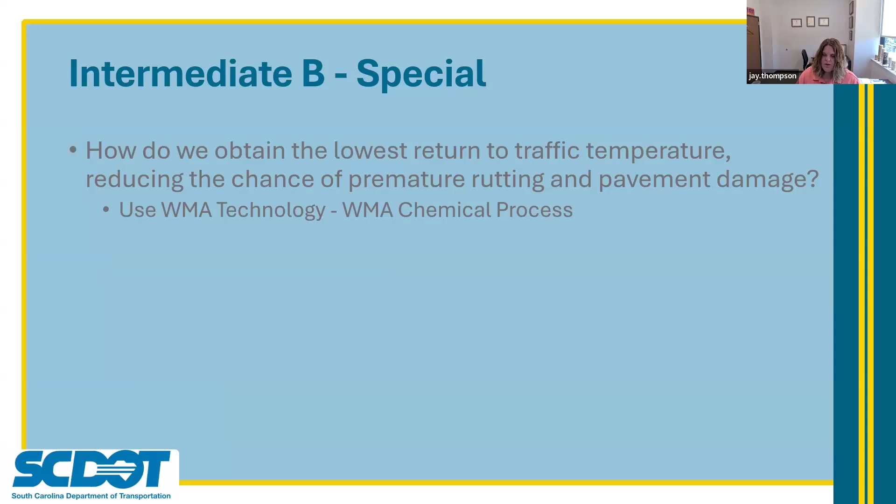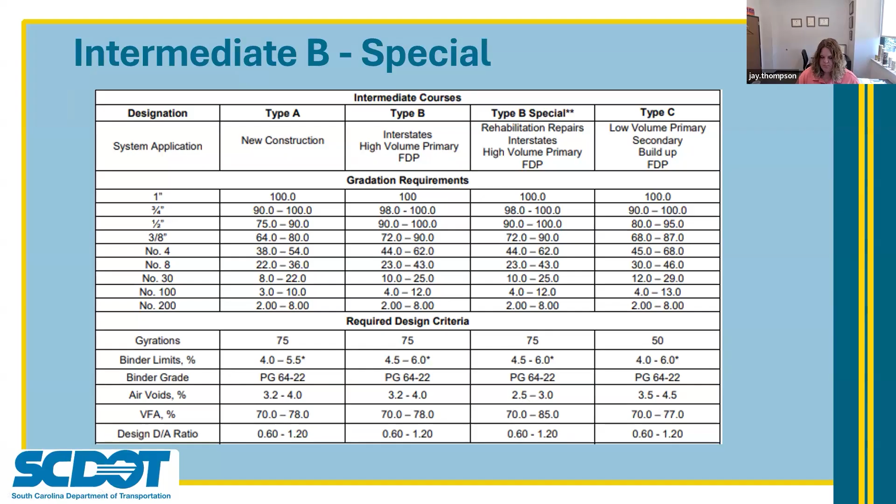From the DOT's side, when this first started, the SCDOT's concerns - the DOT did not want to cut full depth cores every night and leave those holes that could not be compacted properly. Another concern was requiring the contractor to stop early enough so that QC could cool the pavement down to cut these cores and then fill those holes prior to opening traffic. Jay went over that with our test section - that's how we kind of limit those concerns, because they're going to do that during the test section. And then from there forward, we will use gauge shots. The last concern, Travis talked about it as well as Jay, was concern with the vertical edges or the joints not getting enough compaction.

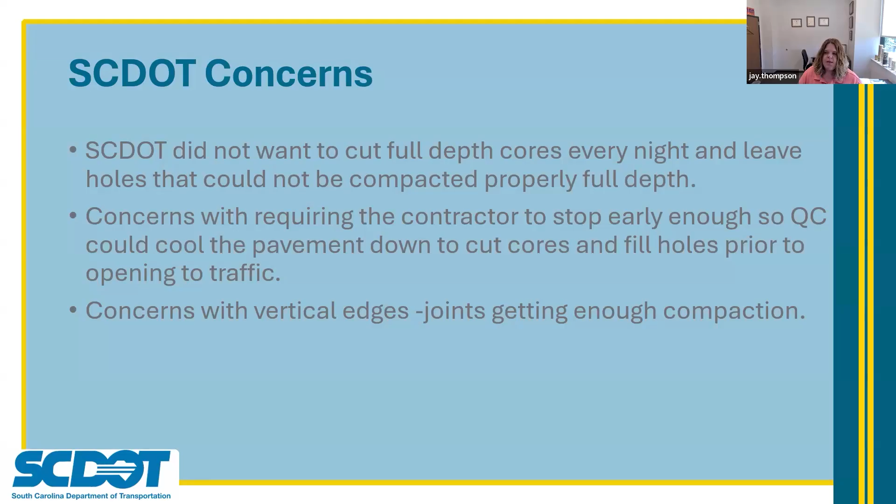And with that, that is the end. I know that was a rush on mix design, but that is the end, and I'll ask Jay to come back.

Great, yes, let's just cover some of these recommendations really quick. I thought this was an excellent webinar, by the way, to our three presenters. Just some really, really good information. So I want to summarize them.

Jay did a great job of highlighting multiple times that the consequences of poor practices are really amplified here, but also following best practices is amplified. You talked a lot about smoothness, density, both joint and mat, and paving operations and logistics.

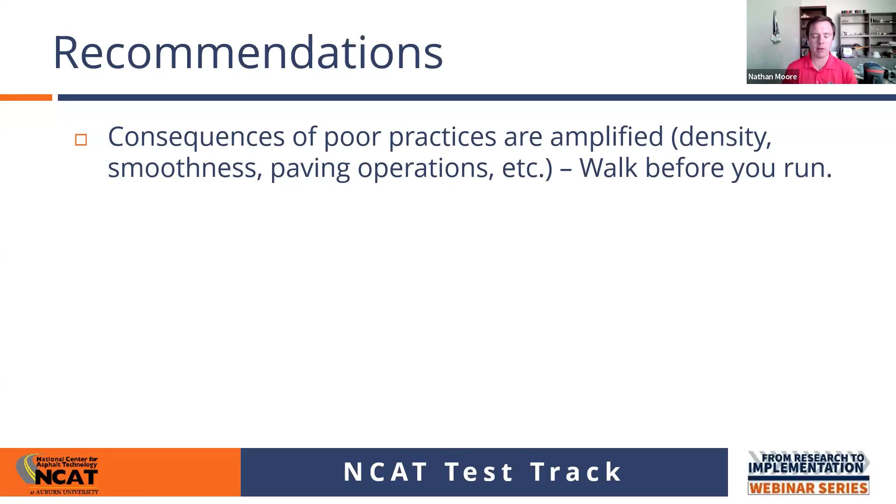And I really like the suggestion to do a trial section, a test section, walk before you run. Even from the tracks perspective, we look at those initial test sections, or trial mixes that we did before we even paved S9 as trial sections. But then honestly, we just keep adding to our knowledge bank to do it better each and every time. Sounds like that's what y'all's contractors are doing as well.

However, even with these consequences, the benefits seem to really outweigh the concerns. You have excellent density, reduced project costs, reduced user costs, more flexibility. You can release the road, open sooner, et cetera. So I like that point.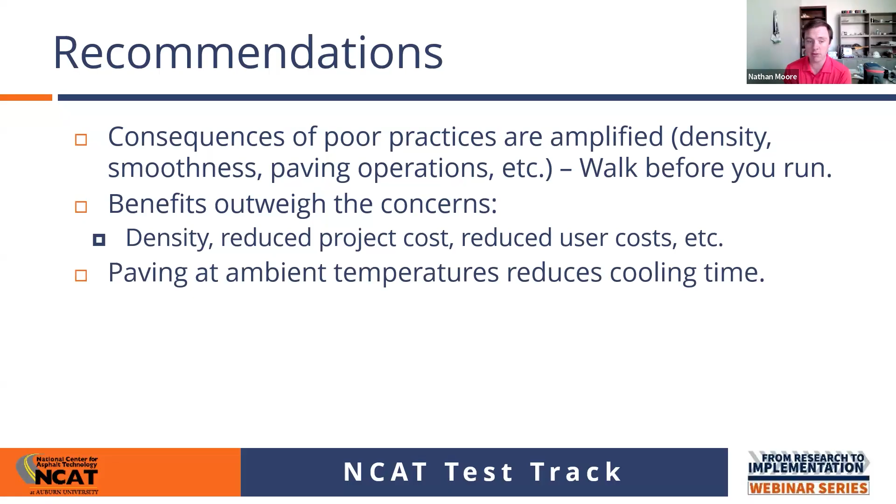A couple of really short practical ones. Paving at ambient temperatures reduces cooling times. When we did this on the track, I think we deliberately paved in the late morning and let it get really, really hot, and it took quite a while. So night paving is a great opportunity to do this.

One thing I learned, I never thought about this until Jay brought it up, is that milling can actually be slower than paving, significantly so, and that you can do this with one paver, but you may need multiple milling machines. And I thought that was really a great point.

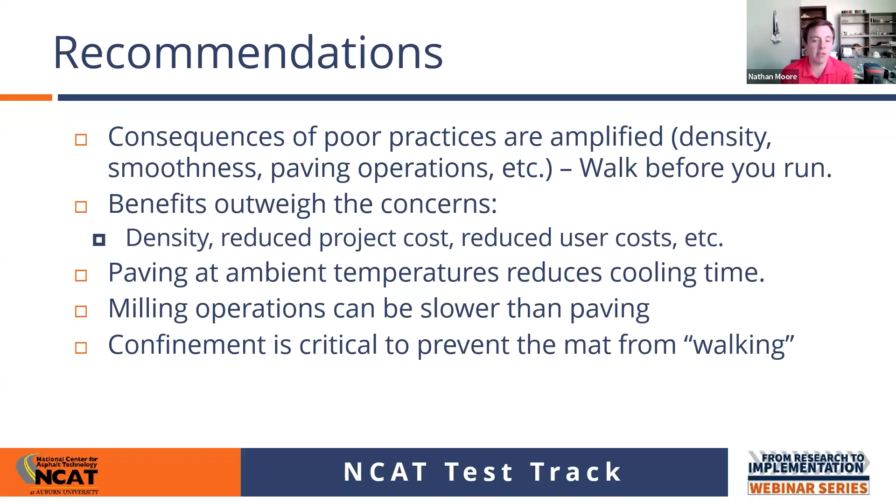Confinement is necessary, it's absolutely critical. Otherwise, you're going to have a bunch of mix walk away from you as it just kind of sloughs out to the side. We've seen that - I can think last year whenever we were doing another test section for South Carolina. We were putting a 6-inch section down, paving a trial mix and trying to mess around with density, and it was unconfined, so it just sort of slumped on those edges. But I thought those were some really practical points.

And then to what Kimmy just said, I like how you mentioned not being afraid to use RAP, because you do need that stiffness, but then also using warm mix additives. Specifically, I know y'all use chemical warm mix additives to achieve the workability that you also need. And I thought that was a great way of framing it - you really need both, RAP and recycled materials and warm mix really achieve that.

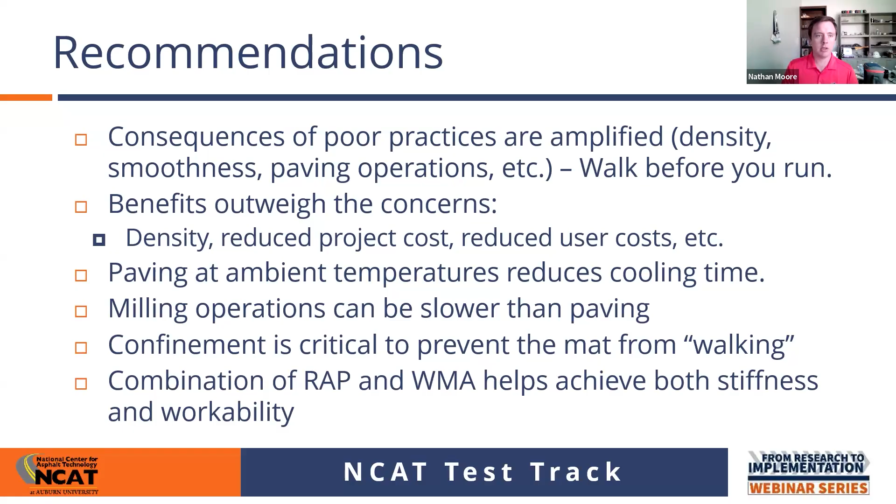Yes, I looked at some of those. One of the first ones that came up was about using warm mix additives here, and I know both the states that I highlighted used the warm mix additive to try to make sure they got compaction. Kimmy, can you speak to why that was so important for you guys there in South Carolina?

Well, I'll let Jay add if he has anything, but it was just important because we knew that in order to return back to traffic, the pavement is a thicker lift, so it's going to take a little bit longer to cool down. Using warm mix will not only give you workability, but you're also starting at an already reduced temperature, so that way you can allow traffic in a timely manner.

Okay, great. Want to add anything? Nothing to add, you nailed it, Kimmy.

Okay, cool. Todd Manziel from Caterpillar asked if pneumatic tire rollers were used, and if there was any comparison between that and the other. Jay, did you guys use rubber tire, or was it all steel wheel rollers with the projects that you did? Don't think I've seen a pneumatic on these - I think we've only done steel wheel. Again, what we're using is a former 12.5 millimeter surface mix.